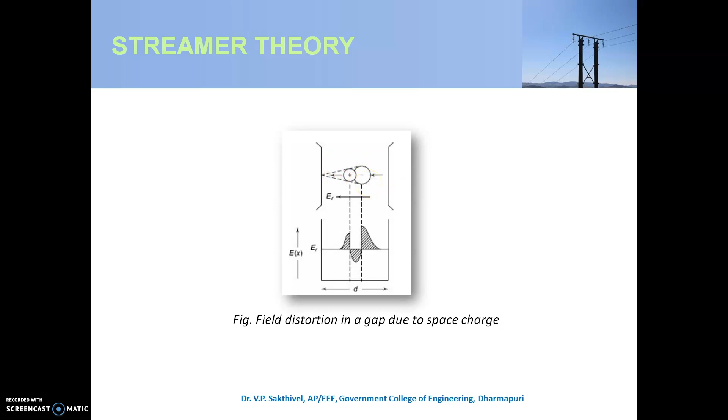When alpha D attains a value of 18 to 20, the space charge field is almost comparable to the applied external field. These avalanches again produce photons due to the secondary ionization process. These electrons generate auxiliary avalanches. Here you see that these avalanches again generate auxiliary avalanches.

Since photons travel with the velocity of light, this process leads to a rapid growth of a conduction channel across the gap. Then the streamer proceeds across the gap. Here you see the streamer produced across the gap to form a conducting filament of highly ionized gas between the electrodes. Thus, breakdown occurs, and the gap is bridged. This is the formation of breakdown according to streamer theory.

Based on that streamer theory, the avalanches are produced. These avalanches again create sub-auxiliary avalanches which bridge the gap between the two electrodes.

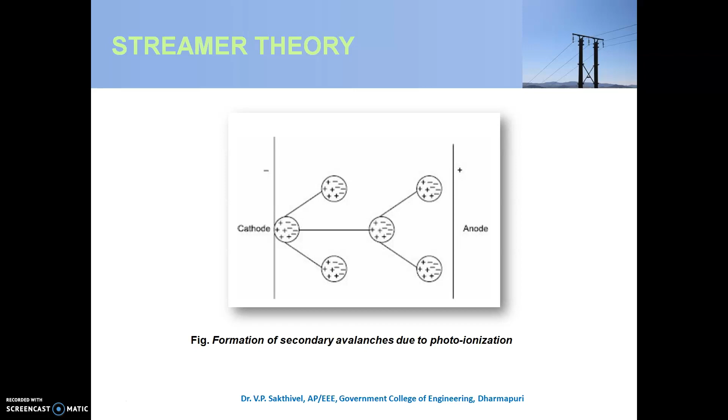Next one is vacuum breakdown. A system is said to be vacuum when the pressure in the system is less than the atmospheric pressure. Then the system would be called a vacuum. In the vacuum system, the pressure is always measured in terms of mm of mercury, where 1 standard atmosphere is equal to 760 mm of mercury at a temperature of 0 degrees centigrade. That is how a vacuum is created, if we maintain the pressure below the atmospheric level.

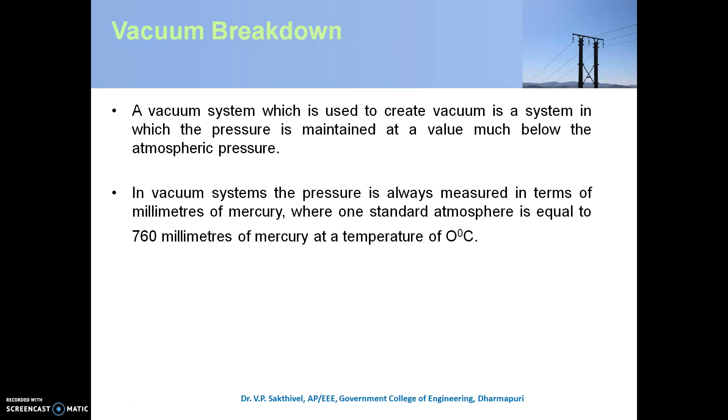Then the classification of vacuum: vacuum can be classified into 3 different types: high vacuum, very high vacuum, and ultra high vacuum. High vacuum is in the range of 10 to the power of minus 3 to 10 to the power of minus 6 torr. Very high vacuum is 10 to the power of minus 6 to 10 to the power of minus 8 torr. Ultra high vacuum is lesser than 10 to the power of minus 9 torr.

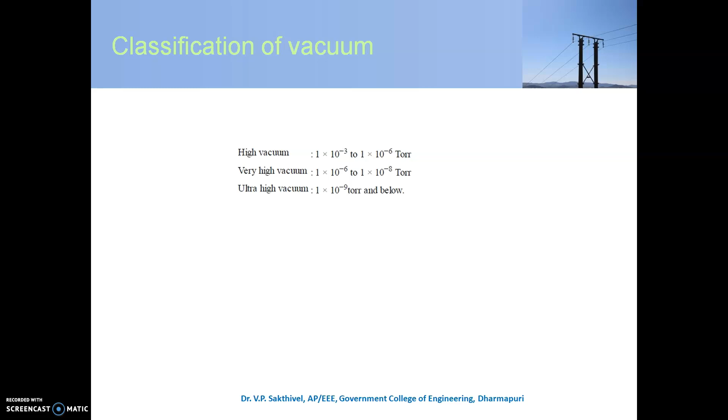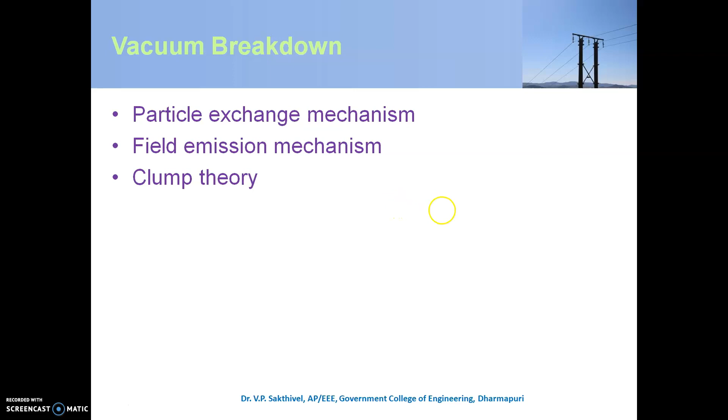Then the breakdown mechanism in vacuum can be explained by 3 theories, namely particle exchange mechanism, field emission mechanism, and clump theory. First, we discuss the particle exchange mechanism. The particle exchange mechanism explains the involvement of electrons, positive ions, photons, and the gases at the electrode surface. In this case, an electron is liberated from the cathode, then again it produces the positive ions and photons.

Here the number of positive ions is considered as A, and the number of photons is considered as C. Again, these positive ions and photons are liberating the electrons. That is, the positive ion A liberates B electrons, whereas the photon liberates D electrons. Okay, that is, the cathode liberates an electron.

Again, this electron produces the positive ions and photons. That is, the number of positive ions liberated is considered as A, and the number of photons is considered as C. This positive ion A liberates the secondary electrons of B, and these photons liberate the secondary electrons of D. Then the breakdown occurs when AB plus CD is greater than 1; then the breakdown occurs in the vacuum.

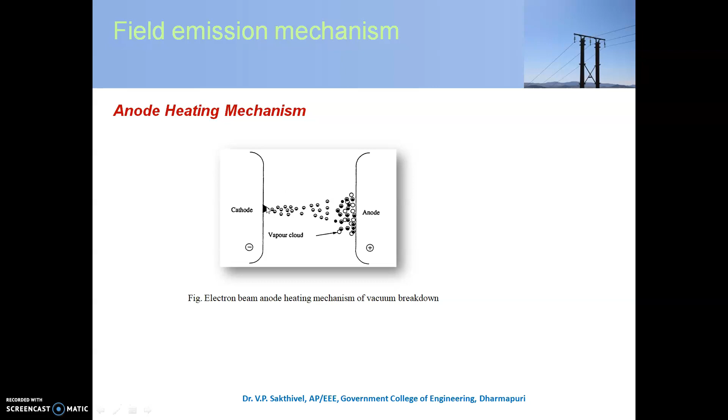This mechanism is called field emission. Then the value is very important. Based on experimental evidence, the breakdown takes place by this process when the electric field at the cathode is about 10 to the power of 6 to 10 to the power of 7 volts per centimeter.

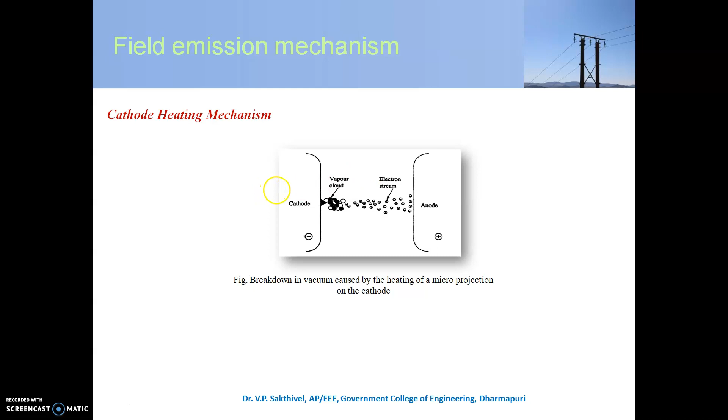Next mechanism is the clump mechanism. According to this theory, the following assumptions can be made. A loosely bound particle exists on one of the electrode surfaces. When you apply a very high voltage across the electrodes, this particle gets charged. Subsequently, it gets detached from the mother electrode and accelerated across the gap, and the breakdown occurs.

The breakdown occurs due to the discharge in the vapor or gas released by the impact of the particle at the target electrode. Here the breakdown condition is given by VE equal to C, where C is a constant, V is the gap voltage and E is the electric field at the electrode of origin.

Here there is a local clump formation of electrons, and due to the application of very high voltage, it is detached from the mother electrode. After that, it accelerates across the gap in order to produce the breakdown.